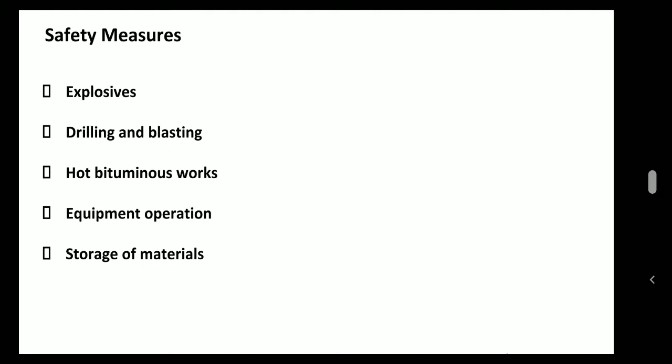Let us see in this lecture how to protect the health and safety of workers engaged in construction activity, for some particular specific activities we will study here. So we will study the safety measures or precautions in explosives, drilling and blasting, hot bituminous works, equipment operation, and storage of materials.

Explosives. An explosive is a substance or mixture of substances which, when initiated suitably, results in violent release of energy in the form of a shock wave, accompanied by extremely rapid conversion of the explosive into a large volume of gases at high temperature and pressure. So it involves chemical substances and releases a lot of energy and gases at high temperature and pressure.

It can cause a lot of injuries, health problems, and sometimes in extreme cases, deaths result from mishandling of explosives. Every individual associated with explosives has to take due care while handling them, because mishandling may subject them to undue spark, flame, shock, impact, friction, and static charge, which may lead to initiation resulting in accidents.

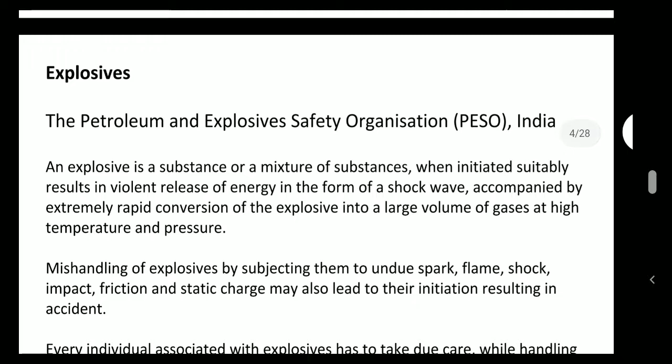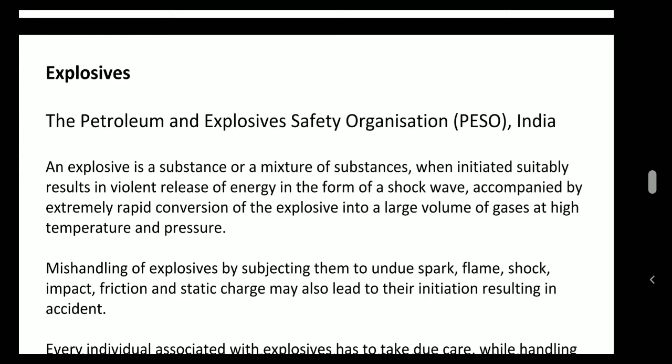There is a lot of literature available, but here we will focus on the precautions published by the Petroleum and Explosives Safety Organisation, PESO of India.

During the storage and usage of explosives, what are the do's? Store explosives only in a licensed magazine. A magazine is a storage place - it can be a box, a compartment, a room, anything specifically designed or designated for the storage of explosives.

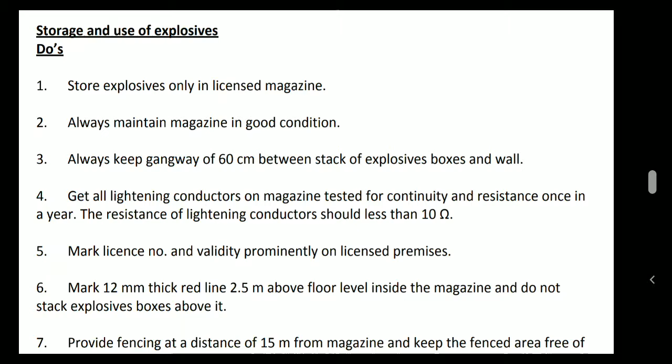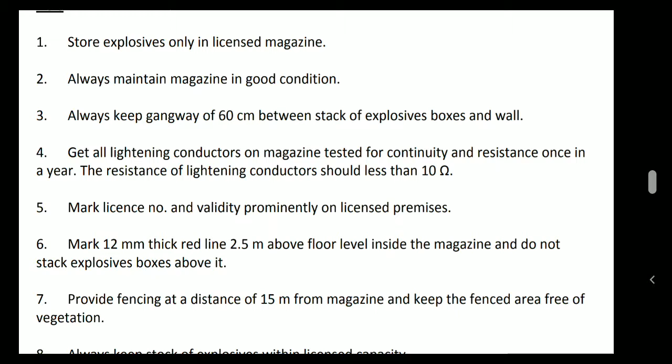Always maintain the magazine in good condition. Always keep a gangway of 60 centimeters, that is, walkway spacing for operations between the stack of explosive boxes and the wall. Get all lightning conductors on magazines tested for continuity and resistance once a year; the resistance of the lightning conductor should be less than 10 ohms, and it should be periodically checked and verified.

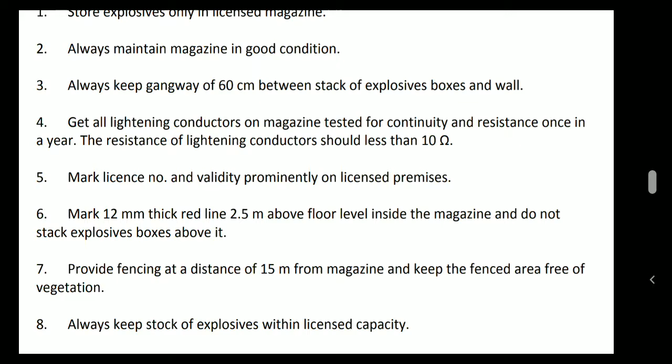Mark license number and validity prominently on licensed premises. Whatever is the license number and expiry or validity period of the licensed premises should be prominently displayed.

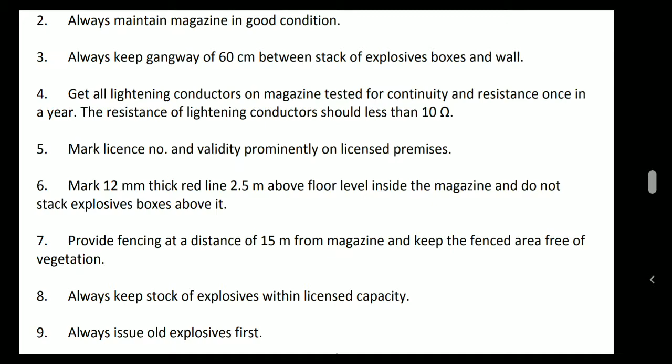Mark a 12 mm thick red line 2.5 meters above floor level inside the magazine, and do not stack explosive boxes above it - so keep the height of explosives to a maximum of 2.5 meters; don't stack them above that. Provide fencing at a distance of 15 meters all around the magazine, and keep the fenced area free of vegetation.

Always keep the stock of explosives within licensed capacity - however much capacity is permitted, only that much should be stored, meaning the tonnage in kilos or number of boxes or explosives should be limited to the licensed permitted capacity. Always issue old explosives first.

This is a first in, first out policy - whichever you receive first should be issued first. Provide security guards around the clock, and keep the security guards' shelter at a distance of 30 meters from the magazine.

Always sell explosives to persons or firms having valid licenses - so engage or deal only with persons having a license to transact in the explosive business. Always report loss, theft, or short receipt of explosives to the Controller of Explosives and police - so any theft, loss, etc., should be brought to the local area police.

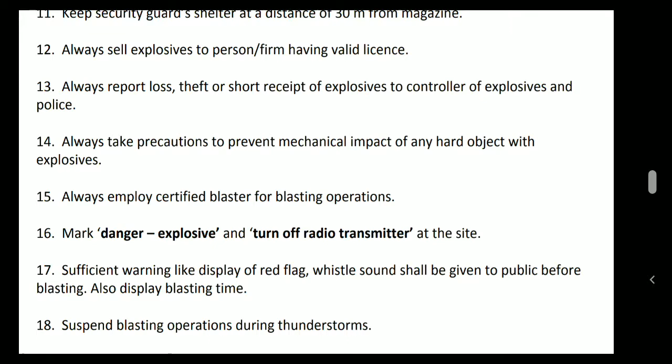Always take precautions to prevent mechanical impact of any hard object with explosives - so no hard object shall be dropped or hit hard against the explosives. Always employ a certified blaster for blasting operations.

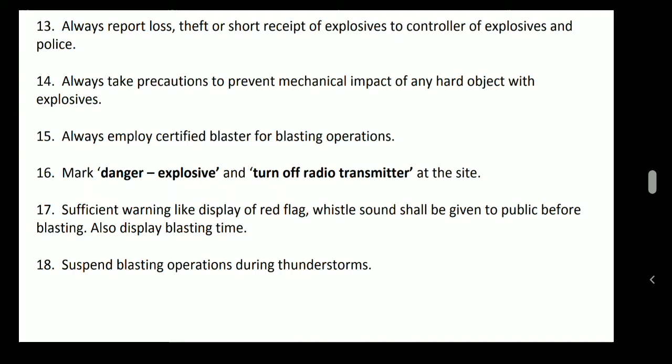Mark 'danger explosive' and turn off radio transmitters at the site. These marks - that it is dangerous explosives, don't use radio transmitters, turn off radio - all this should be prominently displayed at the site.

Sufficient warning by display of red flag and whistle sound shall be given to the public before blasting. Also display the blasting time, so blasting time should be displayed, and a sound, alarm, or whistle should be blown before starting the blasting.

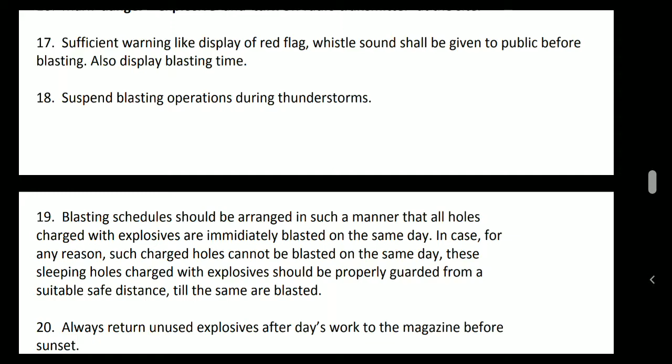Suspend blasting operations during thunderstorms. The blasting schedule should be arranged so that all holes charged with explosives are immediately blasted on the same day. In case such charged holes cannot be blasted on the same day, these sleeping holes charged with explosives should be properly guarded from a suitable safe distance until they are blasted.

As far as possible, all holes charged with explosives should be blasted on the same day. If it cannot be done and must be postponed, proper precautions should be taken until they are blasted. Always return unused explosives to the magazine before sunset after the day's work. Respect explosives. Now let's look at the don'ts during the use of explosives.

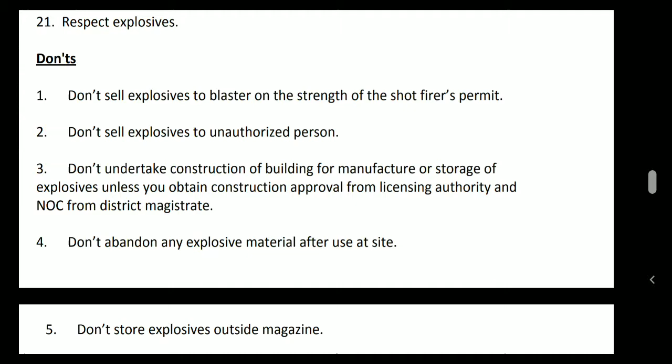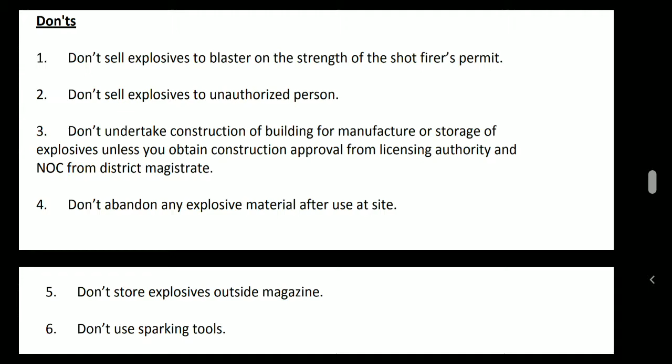Don't sell explosives to a blaster on the strength of the shot firer's permit. Blasting abilities are not valid grounds to sell explosives. Explosives should be sold only to certified, licensed persons. Don't sell explosives to unauthorized persons.

Don't undertake construction of a building for manufacture or storage of explosives unless you obtain construction approval from the licensing authority and NOC from the district magistrate. Anybody having a valid license should only construct the storage facility or do the manufacturing work of explosives. Don't abandon any explosive material after use at the site.

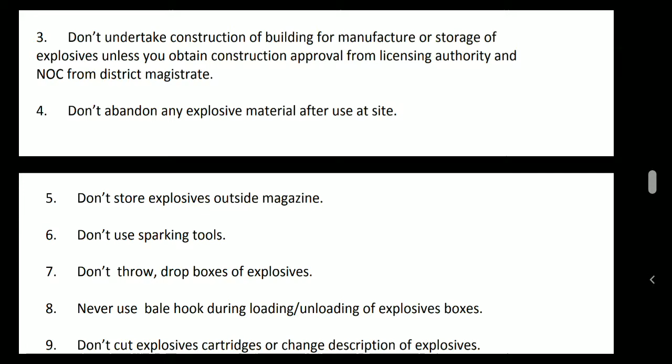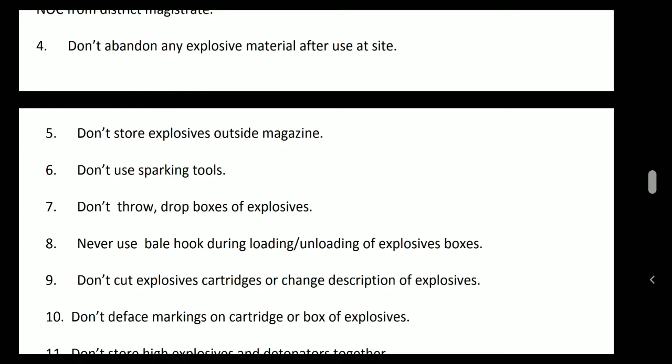Explosive material should be properly taken care of. Don't store explosives outside the magazines. Don't use sparking tools. Don't drop boxes of explosives — they should be kept properly and slowly in place, not thrown or dropped from a height. Never use a bale hook during loading and unloading of explosive boxes.

Don't cut explosive cartridges or change the description of explosives. Don't deface markings on the cartridge or box of explosives. Whatever nameplate or signboard is on the explosive boxes shall not be defaced, hidden, or removed. Don't store high explosives and detonators together.

Don't use misfired explosives — those already misfired at the site shall not be reused. Don't use deteriorated or exuded explosives.

Don't attach a detonator to the detonating cord until everything is ready for the blast. You should have a checklist and check that everything is ready before the detonator is attached. Don't use mobile phones or pagers near the place of storage and use of explosives. Don't use iron implements during preparation of charges, as they may trigger a fire. Don't deliver explosives unless the photograph and signature of the authorized person are verified.

Now we will see the do's and don'ts during transportation of explosives. Always maintain the transport vehicle in good mechanical and roadworthy condition. Always carry two fire extinguishers in the explosive van. In case of breakdown of the explosive van, inform the controller of explosives and local police so they can help in arranging another van, and until the van is arranged they will help protect the explosives.

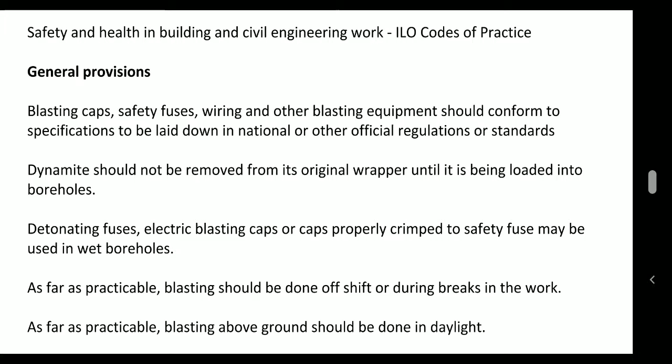Dynamite should not be removed from its original wrapper until it is being loaded into boreholes. Detonating fuses, electric blasting caps, or caps properly crimped to safety fuse may be used in wet boreholes.

As far as practicable, blasting should be done off shift or during a break in the work. Whenever there is a break in the work, then preferably blasting should be done.

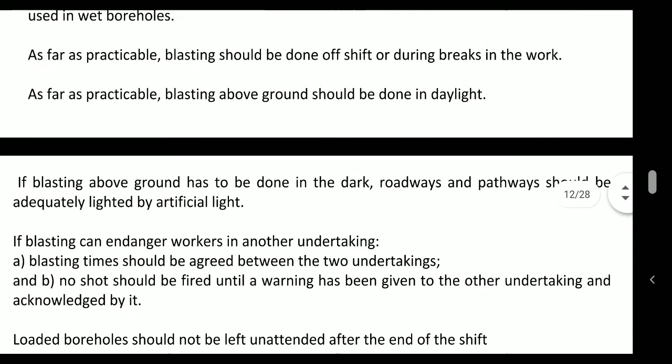As far as practicable, blasting above ground should be done in daylight. Night time is not preferable. If blasting above ground has to be done in the dark, roadways and pathways should be adequately lighted by artificial light.

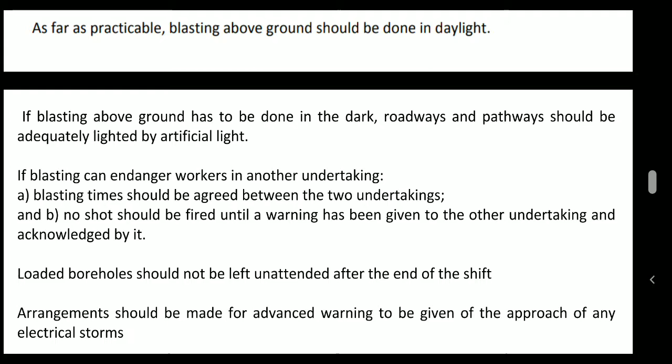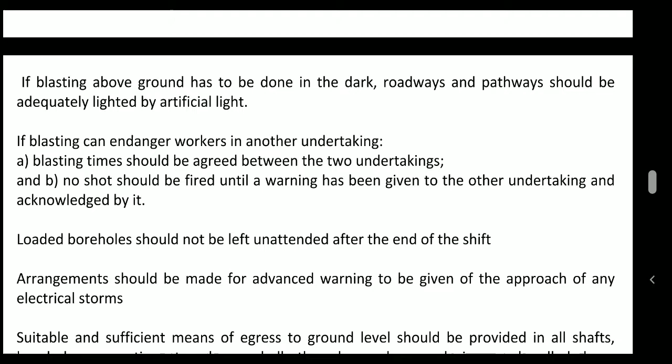If blasting can endanger workers in another undertaking nearby, another company or firm, then they should be informed about the timing, etc., and their agreement or permission also should be taken for the blasting work. It should be acknowledged by them.

Loaded borehole should not be left unattended after the end of the shift. Arrangement should be made for advanced warning to be given of the approach of any electrical storms.

Suitable and sufficient means of egress to ground level should be provided in all shafts, boreholes, excavations, trenches, and all other places where explosives are handled above or below ground level. If explosives are handled, then proper passageway or egress or access way should be provided.

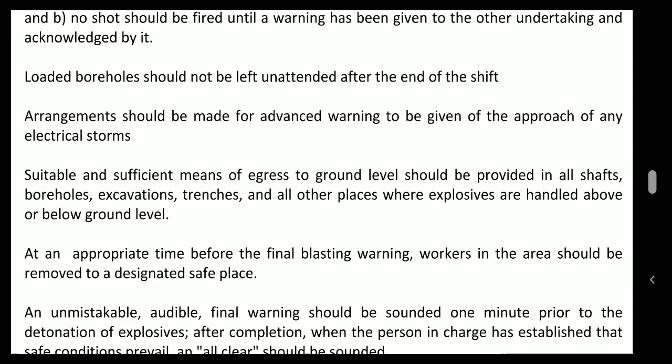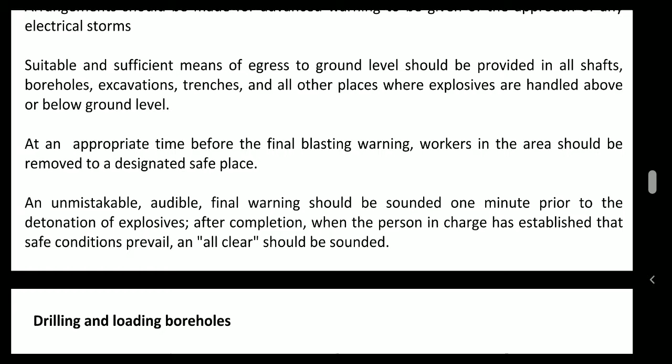At an appropriate time before the final blasting warning, workers in the area should be removed to a designated safe place. An unmistakable, audible final warning should be sounded one minute prior to the detonation of explosives. After completion, when the person in charge has established that safe conditions prevail, an all-clear should be sounded. So proper alarms, sounds, and audible warnings should be given before the blasting and after the blasting is complete. Then precautions during drilling and loading of the boreholes.

Before a borehole is loaded, all workers not employed in the blasting operation should withdraw to a safe place. They should be sent to a safe place. No smoking or open flame should be allowed in the loading area. Blasting cap should not be crimped by biting. Biting shall not be done. Nothing shall be done with your mouth.

Boreholes should be checked with a wooden tamping bar or similar device to ensure that they are safe for the insertion of the charge. Boreholes should not be drilled into other boreholes, misfires, or sockets. A new borehole should only be used for this purpose.

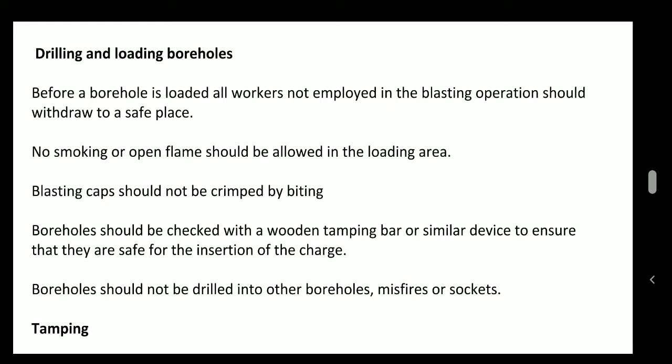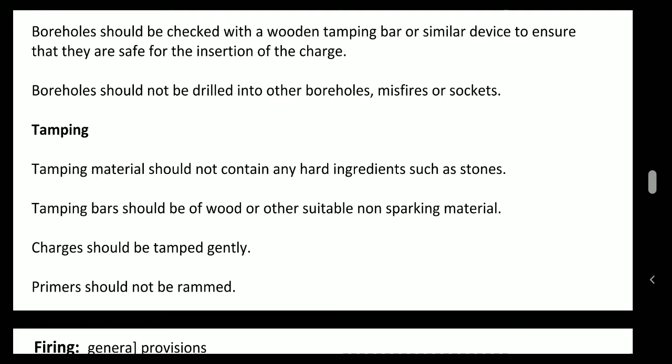Tamping material should not contain any hard ingredients such as stones, etc. - these shall not be used. Tamping bar should be of wood or other suitable non-sparking material, otherwise they may cause or trigger fire. Charge should be tamped gently, done slowly and softly. Primers should not be rammed.

Then precautions during firing. Persons should be prevented from entering the firing area. All shots that could affect one another should be fired together or in a quick succession, in a very short time. All shots in the same round should be fired together, provided that this does not preclude delayed blasting.

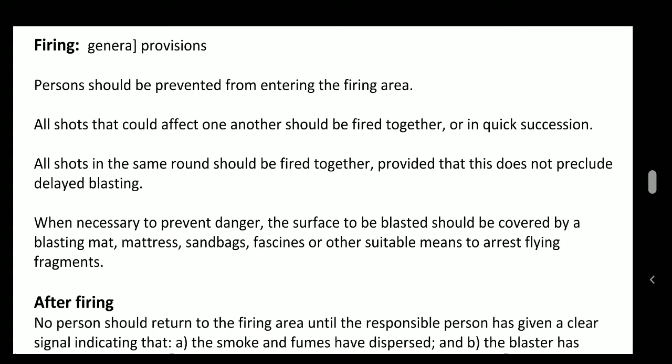When necessary to prevent danger, the surface to be blasted should be covered by a blasting mat, mattress, sandbags, etc. to arrest flying fragments. Proper precautions should be taken so that broken pieces shall not fly to near and far places.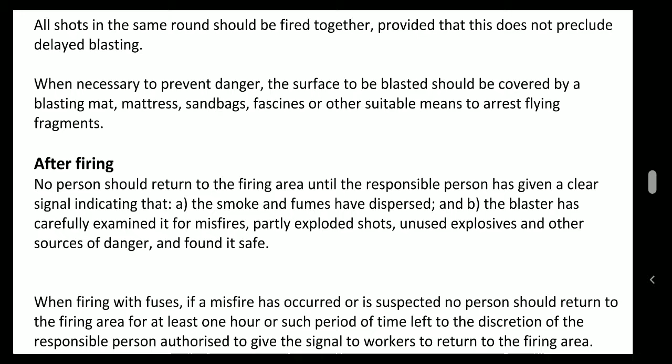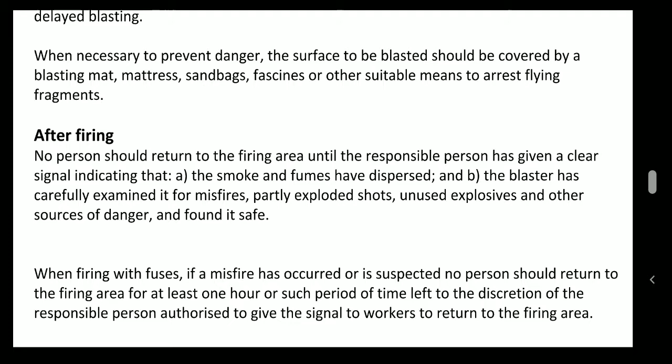After firing, precautions: no person should return to the firing area until the responsible person has given a clear signal indicating that smoke and fumes have dispersed, and the blaster has carefully examined it for misfires, partly exploded shots, unused explosives, and other sources of danger, and found it safe.

When firing with fuses, if a misfire has occurred or is suspected, no person should return to the firing area for at least 1 hour, or such period of time as left to the discretion of the responsible person authorized to give signal to workers. Only after the responsible person gives the signal shall the remaining persons be allowed to return to the site. These are some precautions to be taken during blasting.

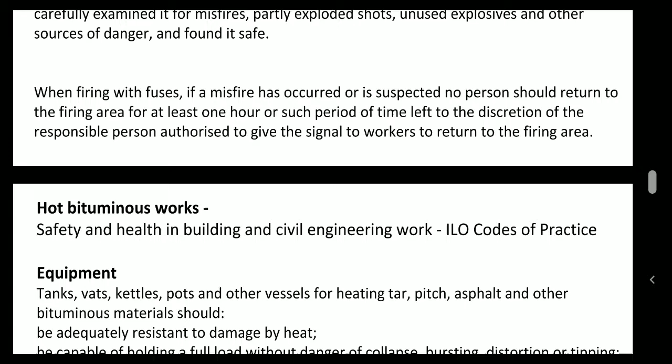More detailed and elaborate suggestions are given in the literature mentioned above, the ILO book.

Next topic is hot bituminous work. The precautions for this also are taken from the ILO codes of practice. What are the precautions to be taken during the operation of bituminous equipment?

Tanks, vats, kettles, pots and other vessels for heating tar, pitch, asphalt and other bitumen material should be adequately resistant to damage by heat, since before using these, they will be heated at very high temperatures. The equipment should be able to withstand that heat.

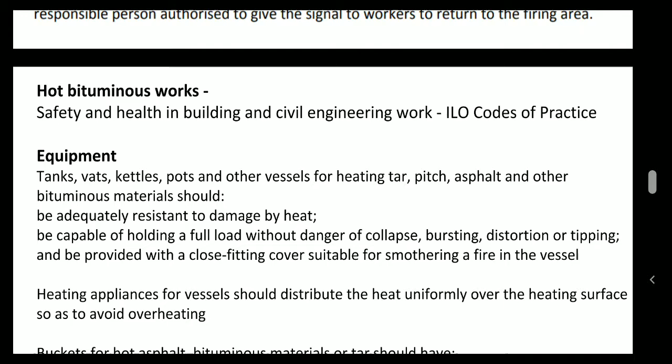It should be capable of holding a full load without danger of collapse, bursting, distortion or tipping. So it shall be strong enough not to fall or be in danger of collapse, bursting, etc.

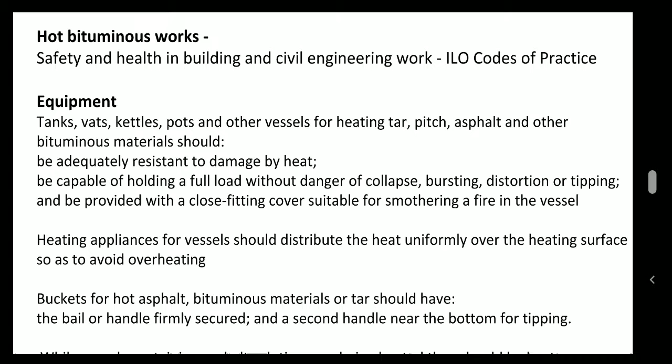Heating appliances for vessels should distribute the heat uniformly over the heating surface. Otherwise, some places will be overheated, some places underheated.

Buckets for hot asphalt, bitumen materials or tar should have the bail or handle firmly secured, and a second handle near the bottom for tipping. So two handles will be there.

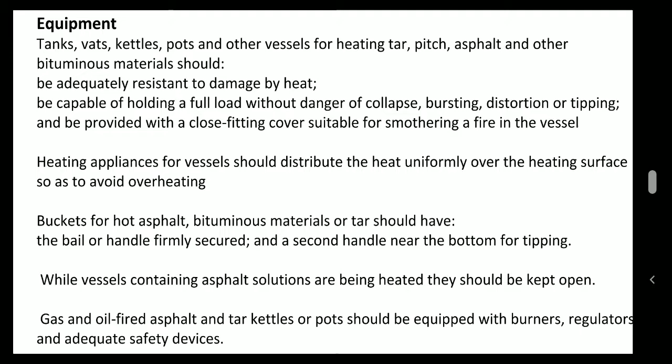Vessels containing asphalt solutions being heated generally have open lids. Gas and oil fired asphalt and tar kettles or pots shall be equipped with burners, regulators and adequate safety devices.

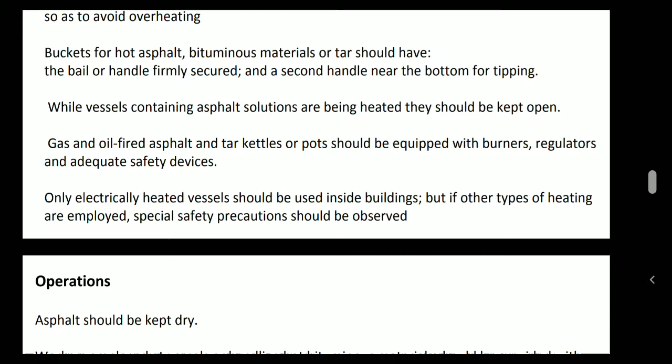Only electrically heated vessels should be used inside buildings. If it is done inside a building, only electrically heated vessels should be used. If other types of heating are employed, special safety precautions should be observed.

Asphalt should be kept dry. Workers employed at vessels or handling hot bitumen material should be provided with suitable protective equipment, meaning cloth, shoes, gloves, cap, mask, etc.

Vessels in operation should be kept at a safe distance from combustible materials. When vessels are used in confined spaces, the gases, fumes, and smoke generated should be removed by exhaust ventilation, or if that is not done, by forced ventilation.

Vessels that are being heated should not be left unattended. They should always be under the observation of proper persons.

Pieces of asphalt or other bituminous material should not be thrown into hot vessels so as to cause dangerous splashing. Any unwanted material shall not be thrown into the drums during heating, as it will cause dangerous splashing. Buckets should not be filled with hot asphalt or other bituminous materials to a level that might cause danger when they are carried or hoisted.

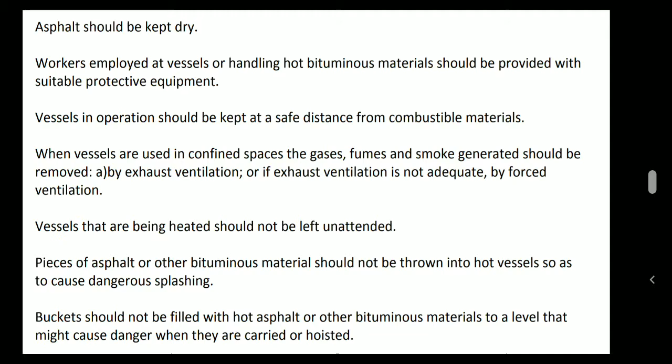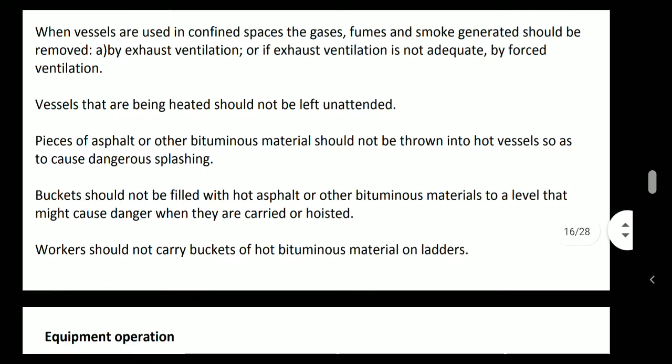Only to the marked levels should they be filled. Workers shall not carry buckets of hot bituminous materials on ladders.

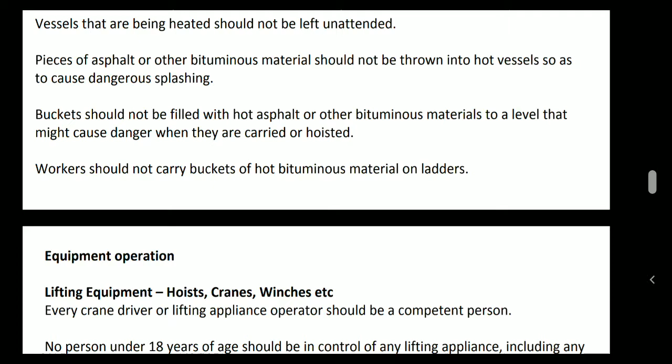Next, what are the precautions during the operation of construction equipment? Having seen the precautions to be taken during hot bituminous works, we move to the next topic: precautions during the operation of construction equipment, tools, machinery, etc. Let us see, in case of lifting equipment like hoists, cranes, winches, etc.

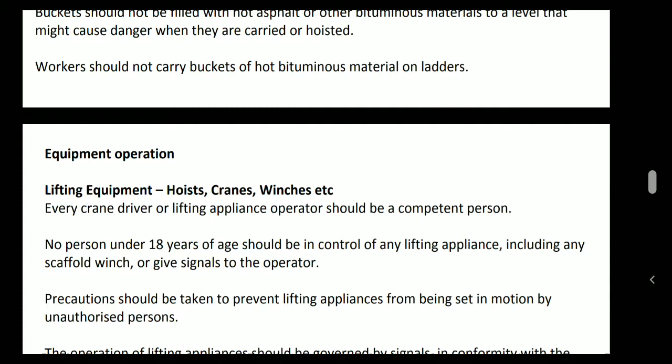Every crane driver or lifting appliance operator should be a competent, certified person. No person under the age of 18 should be in control of any lifting appliance, including any scaffold winch, or give signals to the operator. Precautions should be taken to prevent lifting appliances from being set in motion by unauthorized persons.

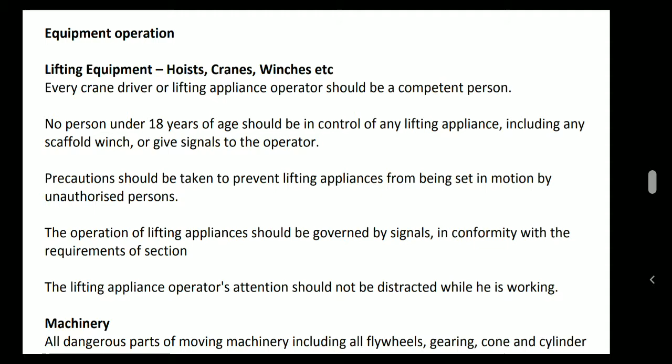Unauthorized persons shall not be allowed to operate the appliances. The lifting appliance operator's attention should not be distracted while he is working.

Machinery. All dangerous various machinery used in the construction industry, including all dangerous parts of moving machinery such as flywheels, gearing, cone and cylinder friction drives, cams, pulleys, crank arms, slide blocks, etc., to the extent prescribed by the competent authority. Shafting and other transmission machinery also liable to present danger to any persons coming into contact with them when in motion should be so designed or protected as to prevent such danger.

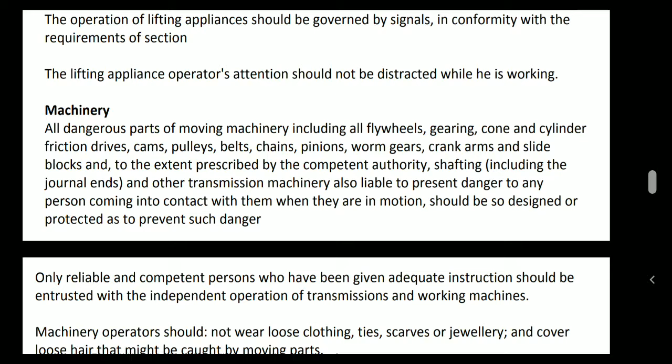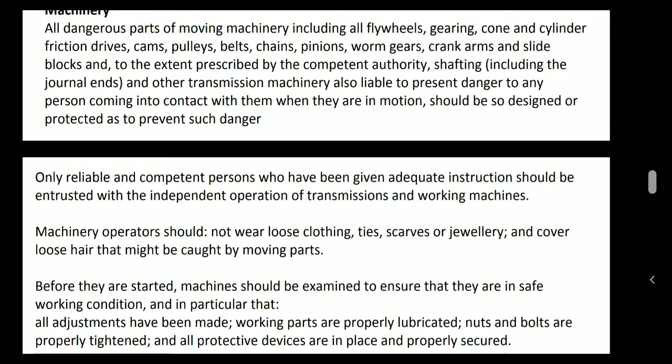So these precautions should be taken while operating the machinery. Only reliable and competent persons who have been given adequate instruction should be entrusted with the independent operation of transmissions and working machines, having proper training, skill, and certification. Operators should not wear loose clothing, ties, scarves, or jewelry, and should cover loose hair that might be caught by moving parts. These are all precautions to be taken by the operators regarding their clothes, jewelry, hair, etc.

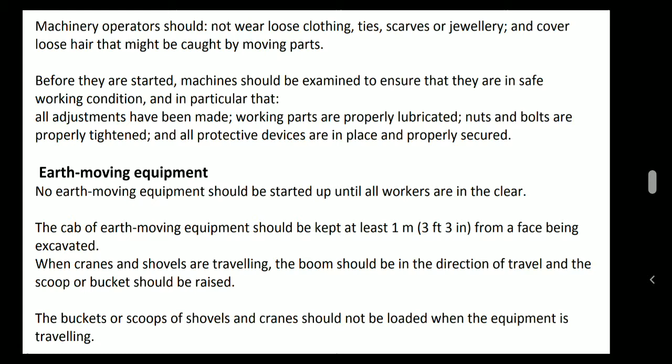Before they are started, machines should be examined to ensure that they are in safe working condition, and in particular, all adjustments have been done, working parts are properly lubricated, nuts and bolts are properly tightened, and all protective devices are in place and properly secured.

Precautions in case of earth moving equipment like excavators, dozers, dumpers, spreaders, etc. No earth moving equipment should be started up until all workers are clear. The cab of earth moving equipment should be kept at least 1 meter from a face being excavated.

When cranes and shovels are traveling, the boom should be in the direction of travel and the scoop or bucket should be raised. The bucket shall not be dragging on the ground. Buckets, scoops, or shovels and cranes should not be loaded when the equipment is traveling. Loading also shall not be done when it is in movement, traveling.

Earth moving equipment should not travel on bridges, viaducts, embankments, etc., unless it has been found safe for it to do so. So while traveling on these structures, proper precautions should be taken to check whether it can carry the weight of the equipment or the forces generated by the traveling of these equipment.

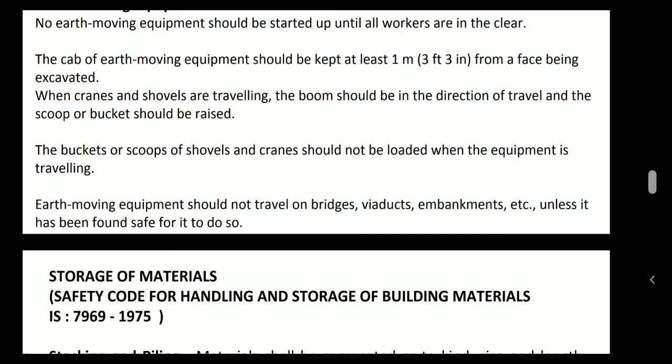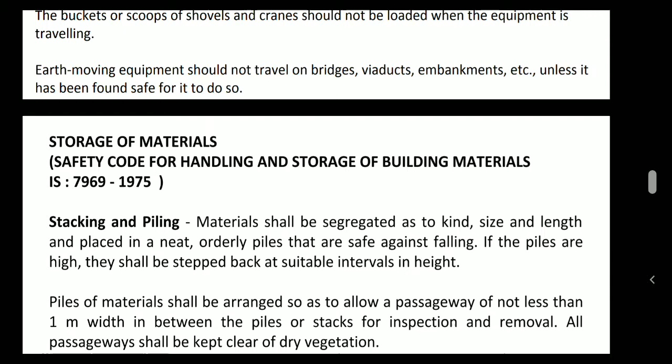The last topic is storage of construction, building, or civil engineering materials, proper health and safety precautions to be taken. This topic is taken from IS 7969-1975, Safety Code for Handling and Storage of Building Materials. So much other literature is also available.

Stacking and piling: material shall be segregated as to kind, size, and length, and placed in neat, orderly piles that are safe against falling. So the various materials should be separated and segregated according to their size, shape, length, weight, etc., and stored in such a way that they should not fall down, roll down, or spread on the ground.

If the piles are high, they shall be stepped back at suitable intervals in height. Piles of material shall be arranged so as to allow a passageway of not less than 1 meter width between the piles, for walkways or operation, etc. The clear distance between the piles should be 1 meter.

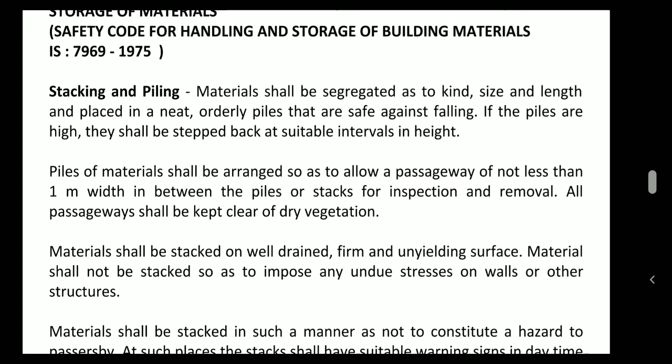All passageways shall be kept clear of dry vegetation; there shall not be any vegetation. Material shall be stacked on well-drained, firm, and unyielding surfaces. The surface shall not be a weak or loose surface where it is stored; it should be a strong, firm surface.

Material shall not be stacked so that it induces unnecessary stresses on walls or other structures, meaning it shall not lean against walls and other structures causing extra stresses. Material shall be stacked in such a manner as not to constitute a hazard to passersby, so that nearby persons—residential or commercial establishments in the area, or persons moving through those areas—shall not be affected by the storage of the materials.

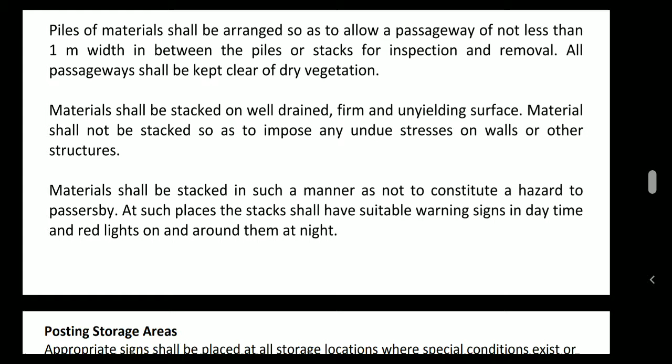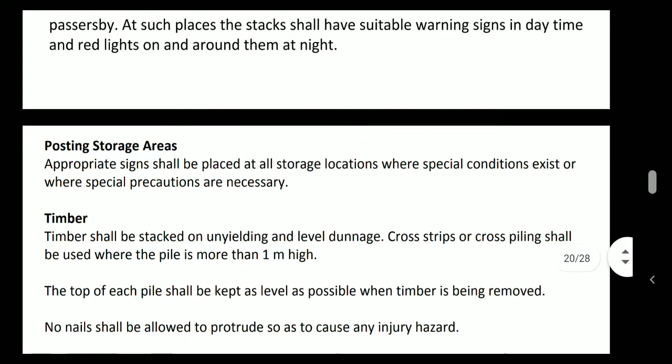If it is to be done in that place, proper warning signs should be displayed, like red lights, etc. Posting storage areas: appropriate signs shall be placed at all storage locations where special conditions exist or where special precautions are necessary, and proper signboards, etc., should be displayed.

Now, storage of timber. Timber shall be stacked on unyielding and level dunnage, meaning generally some timber pieces or logs are kept on the ground and the timber is stored on those dunnage, which should be strong.

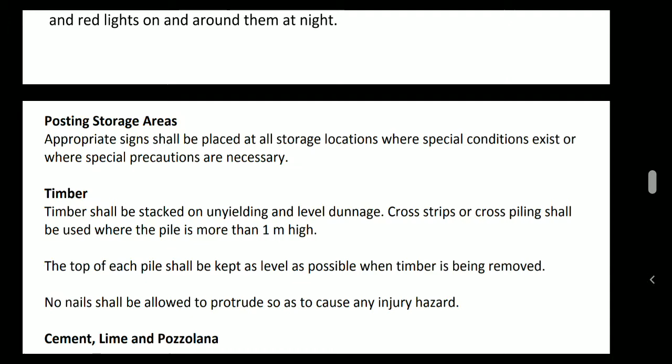Cross strips or cross piling shall be used when the pile is more than 1 meter high. The top of each pile shall be kept as level as possible as the timber is being removed—preferably removed from the top—so that other pieces are not disturbed while removing it.

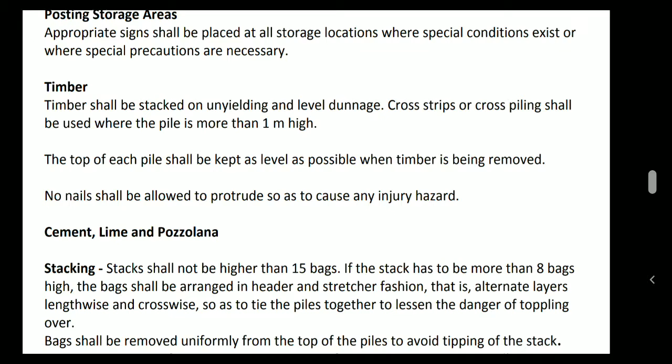No nail shall be allowed to protrude so as to cause any injury hazard. If you are storing any used timber, etc., you should check if there are any nails, and if there are, they should be removed.

Storage of cement, lime and pozzolana. Stacking shall not be higher than 15 bags. If the stack has to be more than 8 bags high, bags shall be arranged in header and stretcher fashion, that is, alternate layers of lengthwise and crosswise, so as to tie the piles together to lessen the danger of toppling over. 15 bags is the general limit, and if storing more than 8 bags, you should store them lengthwise and crosswise alternately.

Bags shall be removed uniformly from the top of the piles to avoid tipping of the stack. This applies to all materials. Generally, it should be removed from the top, meaning here it is last in, first out.

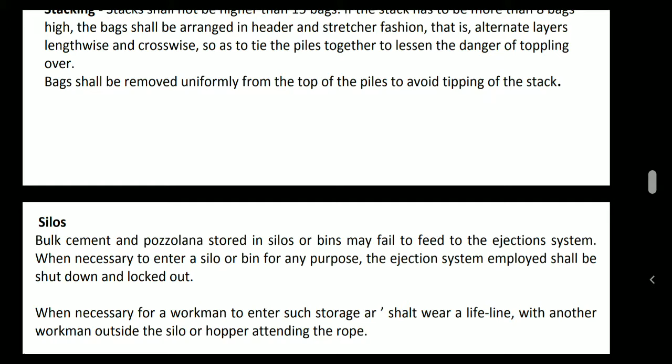Silos. Bulk cement and pozzolana stored in silos or bins may fail to feed to the ejection system. When necessary to enter into a silo or bin for any purpose, the ejection system employed shall be shut down and locked out. So if people want to enter into the silos for storage or repair, these systems should be shut down and locked out before such operations.

When necessary for a workman to enter such a storage area, he shall wear a lifeline with another workman outside the silo attending the rope. So 2 persons should be minimum there. If one person is going inside, he should have all life security tools with him, while another person waits outside to protect that person in case of any accident.

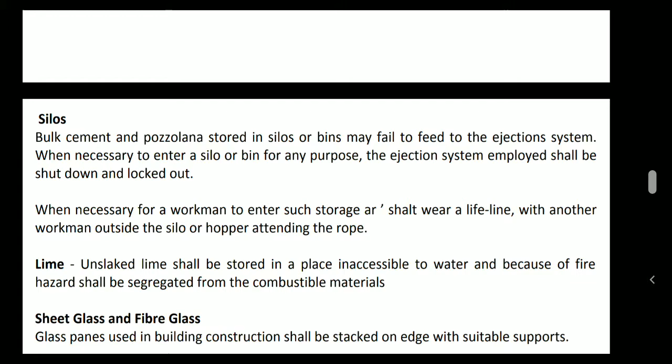Lime. Unslaked lime shall be stored in a place inaccessible to water, and because of fire hazard shall be segregated from combustible material. Similarly, in cement and sand, water or moisture should not be allowed to enter.

Sheet glass and fiberglass shall be stacked on edge with suitable supports on the edges. Glass edges shall be covered or protected to prevent injuries to workmen passing by, because glass can cut or cause injuries just by touching. Proper precautions should be taken so that they shall not damage parts of any person's body. Waste glass pieces shall be stored or disposed of in such a manner as to avoid injuries to workmen.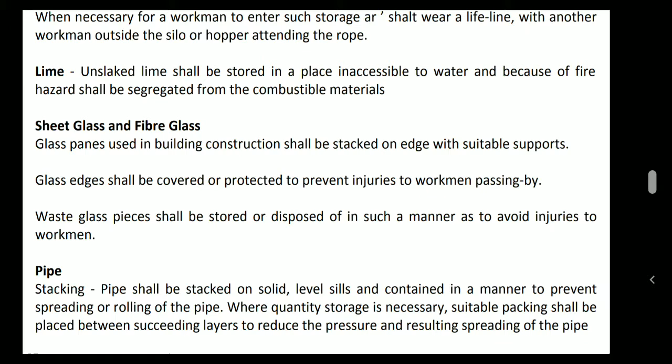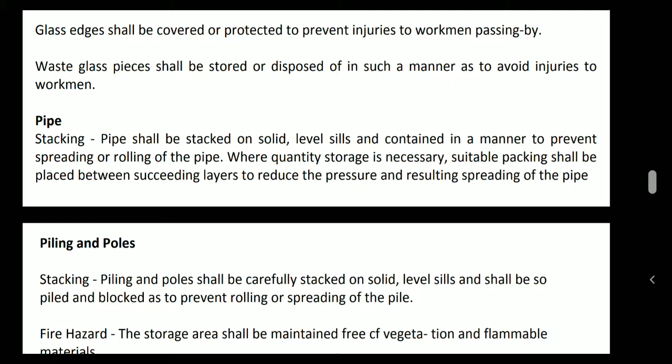Piping material. Pipes shall be stacked on solid level sills and contained in a manner to prevent spreading or rolling of the pipe. Rolling of the pipe shall not occur. Where quantity storage is necessary, suitable packing shall be placed between succeeding layers to reduce the pressure and resulting spreading of the pipe.

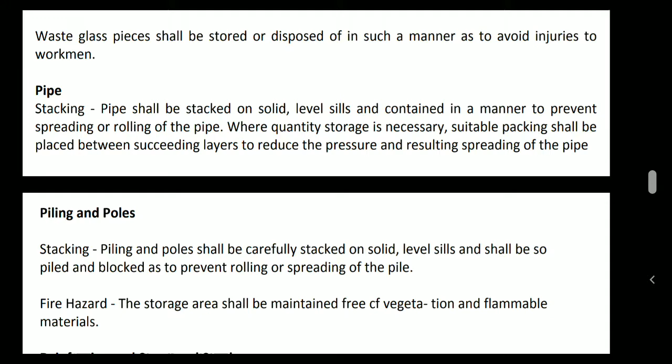Piling and poles used in scaffolding shall be carefully stacked on solid level sills, and piled and blocked so as to prevent rolling or spreading of the pile. Also there shall not be any fire hazard because of these wooden poles.

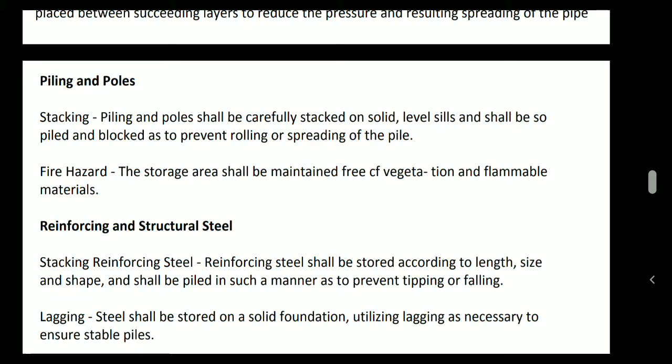Fire hazard. Storage area shall be maintained free of vegetation and flammable materials.

Storage of reinforced and structural steel. Reinforced steel is generally used in RCC concrete works, while structural steel is used in steel structures. Reinforced steel shall be stored according to length, size and shape, and shall be piled in such a manner as to prevent tipping or falling.

Steel shall be stored on a solid foundation utilizing lagging as necessary to ensure stable piles. Safe access should be there, and adequate spacing shall be maintained between piles to ensure safe access.

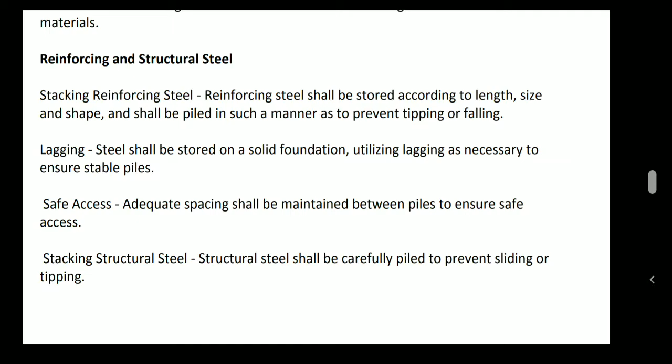Coming to structural steel, it should also be segregated and stored according to size, dimensions, weight, etc., carefully piled to prevent sliding or tipping.

Similarly, precautions for storing sand, gravel and crushed stone. Location of stockpiles: stockpiles of these materials shall be located to provide easy access for withdrawing. It should be very near to the working site because they require short time, heavy quantities, etc. They should be kept as near as possible to the working site.

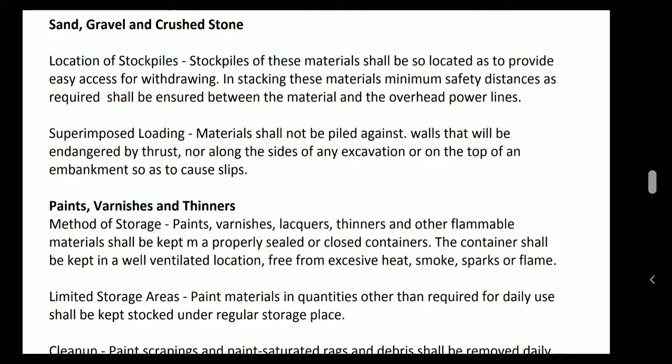Superimposed loading should be checked. Material shall not be piled against walls that will be endangered by thrust, nor along the sides of any excavation or on top of an embankment so as to cause slips. So superimposed loading should be checked properly so they do not cause any stresses in these structures or embankments, etc.

Paints, varnishes and thinners. Method of storage: paints, varnishes, lacquers, thinners and other flammable materials shall be kept in properly sealed or closed containers. They should be sealed and closed. The container shall be kept in a well ventilated location, with a lot of ventilation available, free from excessive heat, smoke, sparks, or flame.

Limited storage areas.

Limited storage areas. Paint materials in quantities other than required for daily use shall be kept stocked under regular storage place. Only that which is used or required within 1 or 2 days shall be kept on site. The remaining should be stored separately.

Clean up. Paint scrapings and paint saturated rags and debris shall be removed daily from the premises and destroyed by burning at a safe place.

Ventilation and lighting. Ventilation adequate to prevent the accumulation of flammable vapors to hazardous levels of concentration shall be provided in all areas where painting is done. When electric lights, switches, or electrical equipment are necessary, they shall be of explosion proof design.

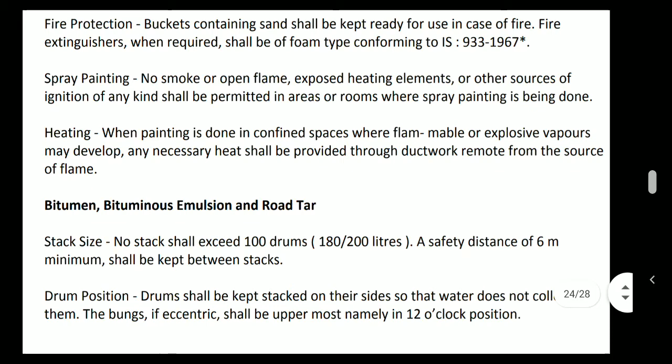Storage of bituminous emulsion road tar. No stack shall exceed 100 drums. A safety distance of 6 meters minimum shall be maintained between stacks. So 100 drums is the maximum, and 6 meters minimum distance should be provided.

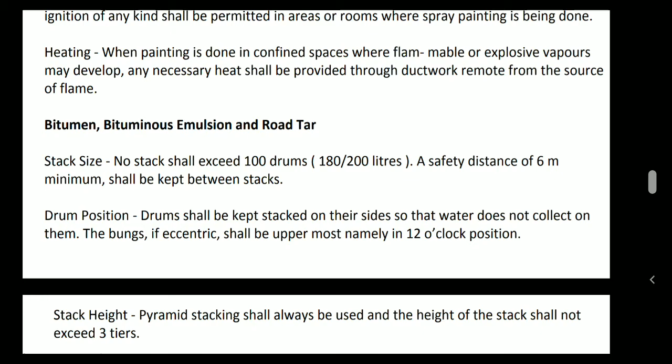Drum position. Drums shall be kept stacked on their sides, not vertically, because otherwise water will accumulate on the lids and can spoil the containers. The height of the stack shall not exceed 3 tiers.

Flammable materials, such as petroleum, kerosene and other materials. Workmen shall be required to guard carefully against any part of their clothing becoming contaminated with flammable fluids, so the clothes of the worker should be protected. They shall not be allowed to continue work when their clothing becomes so contaminated; if contaminated, they should be relieved from duty for that day.

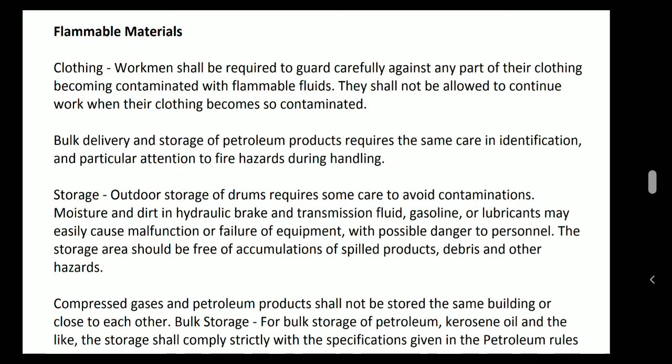Bulk delivery and storage of petroleum products requires the same care in identification and particular attention to fire hazards during handling.

Storage: outdoor storage of drums requires some care to avoid contamination by moisture and dirt in hydraulic brake fluid, transmission fluid, gasoline or lubricants, as any contamination may easily cause malfunctioning or failure of equipment with possible danger to personnel. The storage area should be free of accumulations of spilled products, debris and other hazards.

Compressed gases and petroleum products shall not be stored in the same building or close to each other. These also come under flammable materials.

Bulk storage. For bulk storage of petroleum, kerosene oil and the like, storage shall comply strictly with the specifications given in the petroleum rules. As I told you, for every operation generally each country has given its own standards and regulations, so first they shall try to follow those rules and regulations.

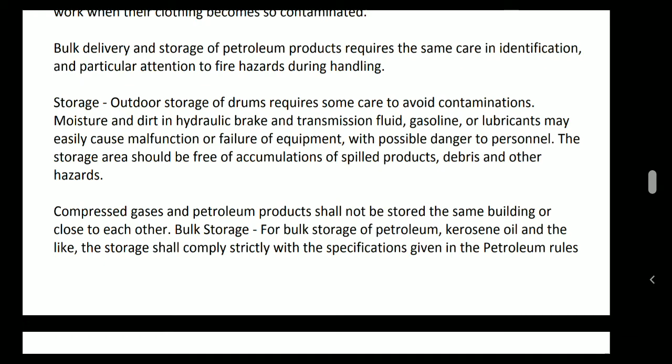Fire extinguishing equipment. Appropriate and adequate fire extinguishing equipment shall be provided at all storage locations, irrespective of whatever material it may be. Bulk storage depots.

Where flammable and combustible materials are stored in bulk for a considerable period, automatic fire alarms of suitable design shall preferably be installed and employed in the storage of flammable materials.

Workers handling excavated earth from foundations, particularly if the site happens to be a reclaimed or marshy area, shall be protected against infections affecting exposed portions of the body. This is another precaution that should be taken.

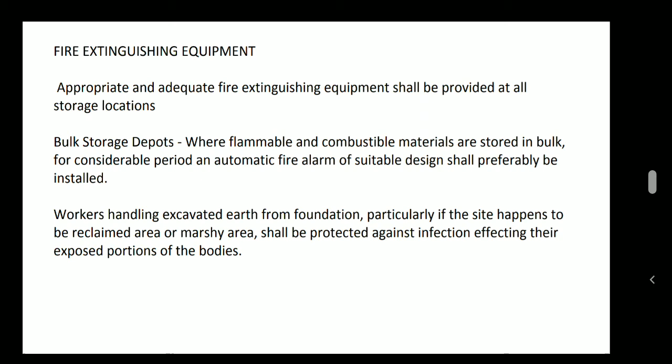Infections, particularly during earthworks in rainy seasons, are likely to occur, and workers may easily spread them to other workers. So proper precautions should be taken against these infections, fevers, etc.

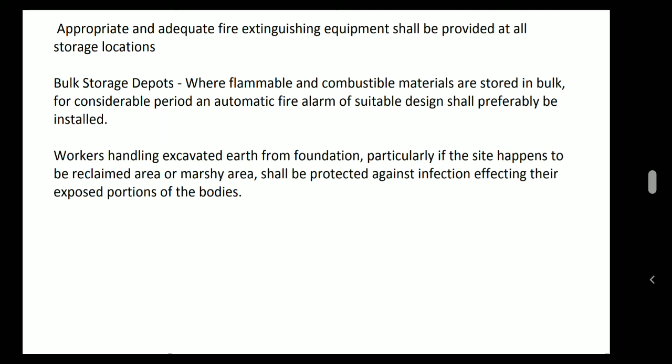So in this lecture we have discussed the safety measures and precautions to be taken in some important construction activities and storage of construction materials. Thank you.